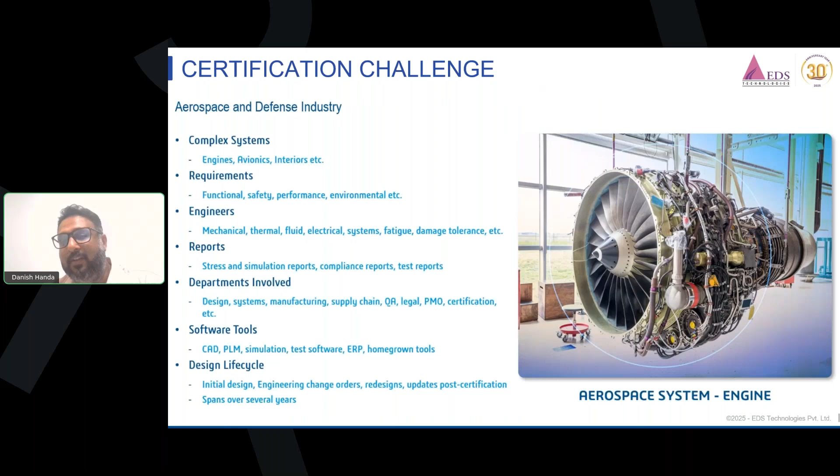So definitely there are some departments and tools involved, because physical testing and all will definitely inculcate a huge cost. So how we can cut down the cost is through our software solutions - that is good CAD solution, good simulation solution, good testing software, even product lifecycle management, etc. So today we will be having interest over these particular aspects.

So this was one of the examples I showed, but definitely it's not the only one. There are several examples, case studies, and challenges that aerospace industries deal with, in terms of system architecture, powers, solar power, battery modules, because nowadays many industries are working on battery packed aircraft, fuel cells, and entire avionics architecture. Then there's fluid dynamics, air flows, headwinds, tailwinds, gearboxes, and definitely the structural aspect is one of the cases. So we'll be studying how we can help you with all these aspects.

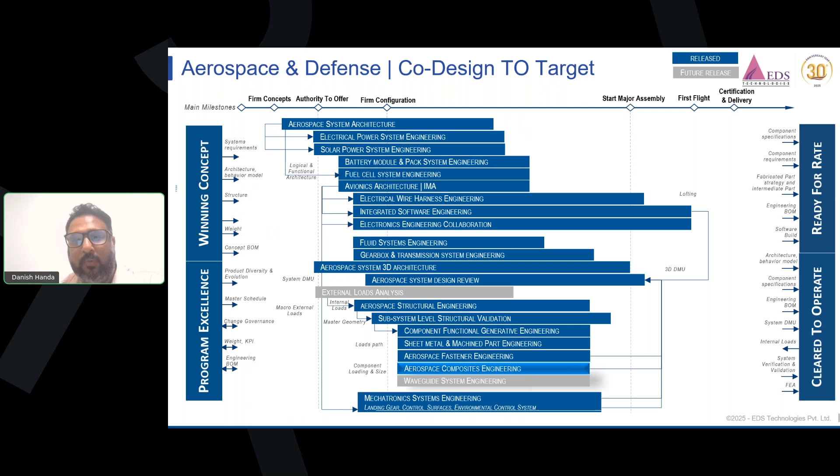So I want to show you one video of how Airbus is handling things smartly with respect to our solution. This is a short video.

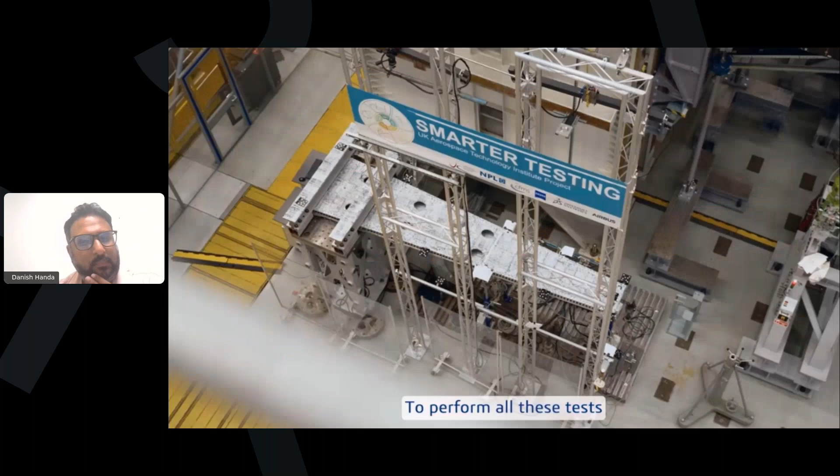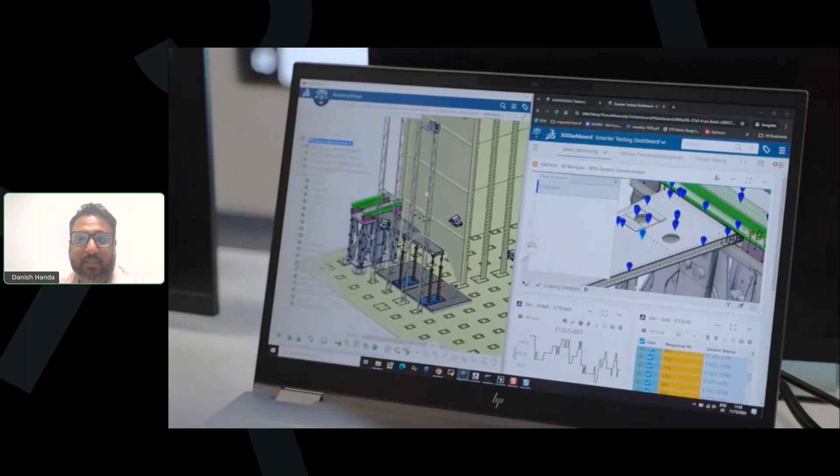This is basically a smart testing rig, which is very expensive, that they use for their actual testing. But as I told you, these can be replaced by simulations, reducing the overall cost of the prototype, because many such prototypes need to be developed. You can visualize here, they have created an entire test rig and how they are doing simulations based on that.

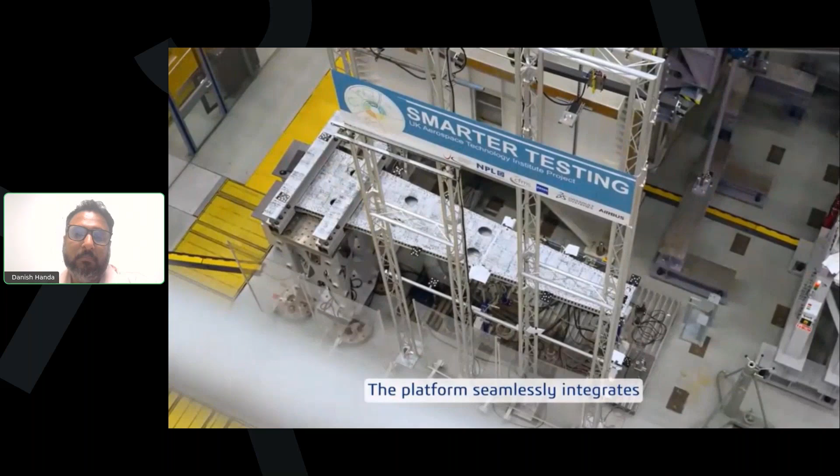So Dassault Systèmes definitely gives you a better view of how this particular test, with respect to all your standards, can be performed in a well-mannered environment. So from design to simulation to product lifecycle management to manufacturing, it can handle everything.

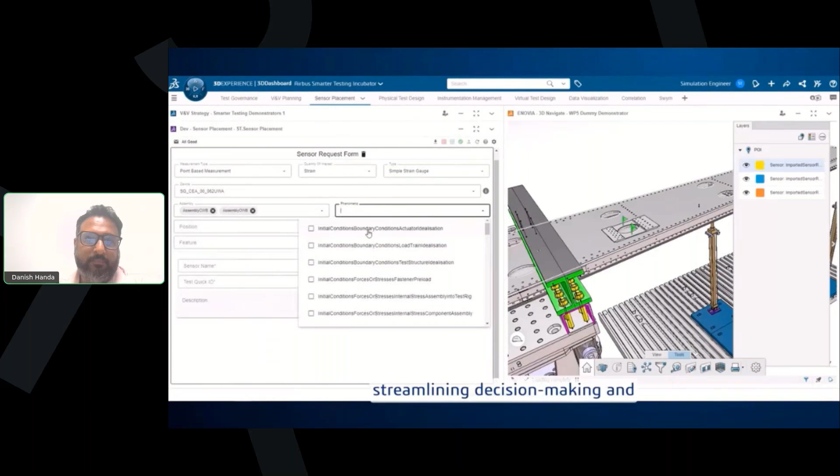So this was one of the videos I wanted to show you before moving further. Now I want to move ahead with the particular structural aspect.

As we are dealing with aerospace, one thing that comes into picture is how lightweight the structure should be, because the structure should be lighter weight as well as of highest strength. That is how we can save cost because of fuel efficiencies and the payloads we need to carry. So it is very expensive in nature. How can we reduce the cost, how can we have a better structure?

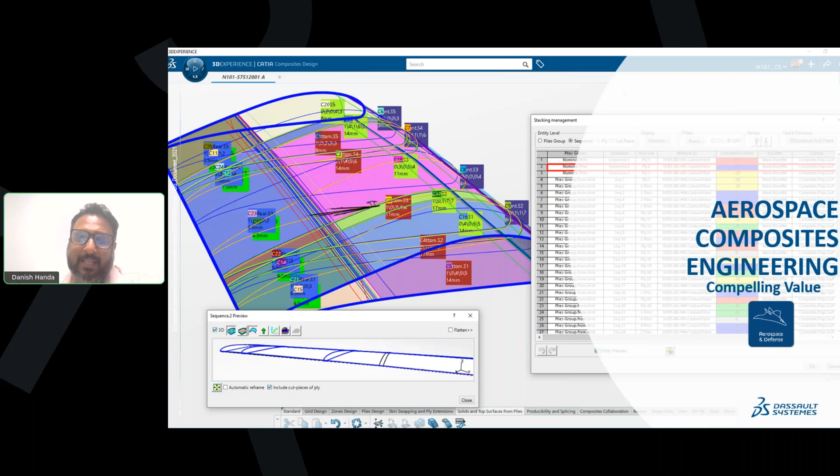So here I will make you understand how the designing as well as simulation can be done in the particular software, and how you can enhance the productivity of the components you are making.

Moving towards the first case. So if you can see here, we deal with different tools. In this case, I will be demonstrating CATIA composites. CATIA is basically a designing tool, and the composite module is introduced in CATIA to make complex shapes and structures. So you will understand how this happens, and then we will move towards simulations.

optimizations, fatigue analysis, as well as some kind of parametric and non-parametric optimizations. So this will help us understand how the interlink of designing and simulation plays a vital role.

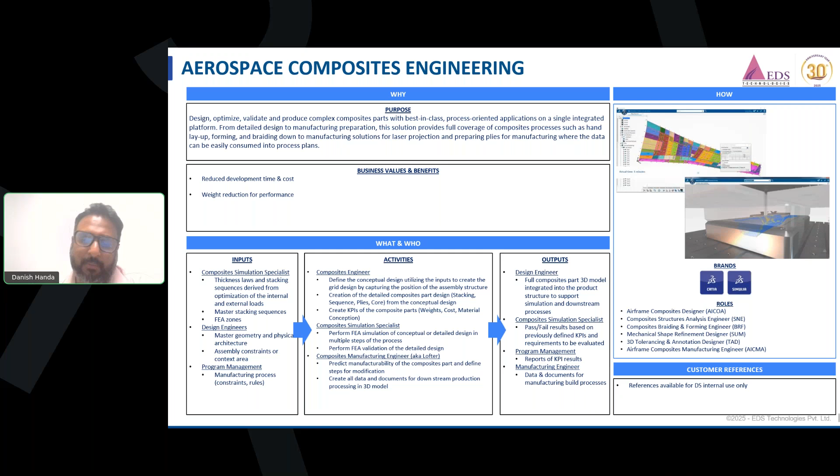As we can see here, this particular slide is towards the designing of a particular component, that is a fuselage component. So you can see that detailed design is very important. Detailed designing of composites means the layup sectioning, how staggering is happening, how ply drop, how the overlapping of composite is happening.

This is very much effective because the structures are very complex in nature. It is not uniform, so you need to have certain non-uniform thicknesses. So how is it performed?

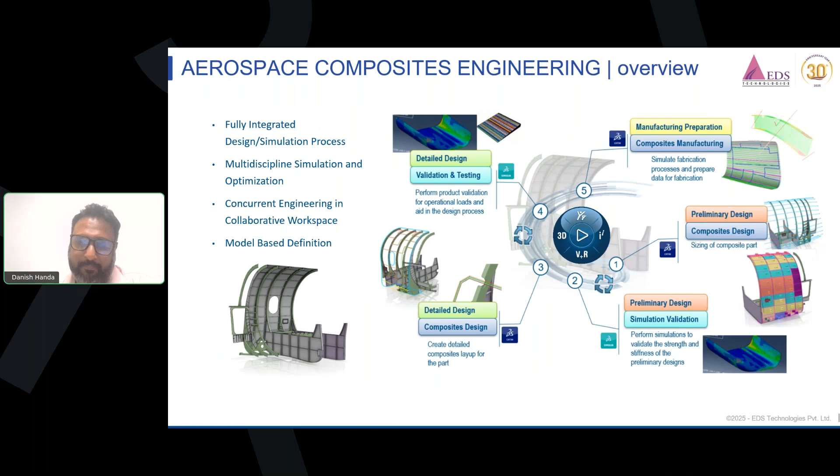So if you can see, it not only handles the layup sectioning of the composite material, but it can also handle the manufacturing engineering. We do have different software which can be integrated with CATIA to handle the manufacturability effect, such as hand layup, laser cutting effect, even automated fiber placement effects. So all these things can definitely be very well handled with respect to simulation.

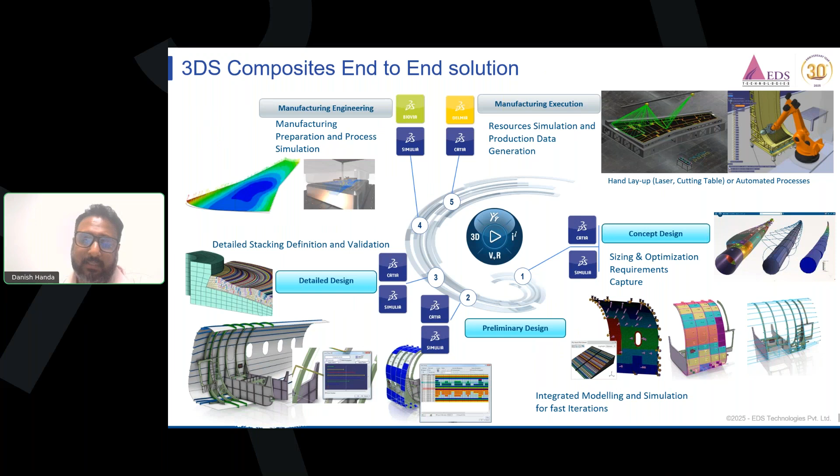And how we do the composite designing is with respect to four different criteria: manual ply, known as hand layup sectioning, then classical zone approach, solid slicing approaches, and grid design. So I'll be demonstrating what all these things are.

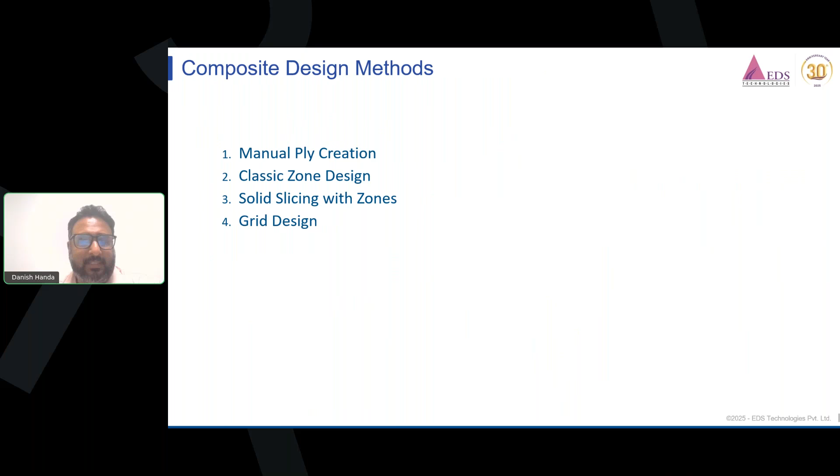So first of all, the manual approach. As we do hand layup processes, that is, we cut the prepregs or we cut the fabrics and we place them on the particular aspect.

This is known as manual ply creation, where you understand what ply you will be putting first on the mandrel or mold, then give the material properties as well as material orientation to that particular ply, and then get the manufacturing drawing out of it.

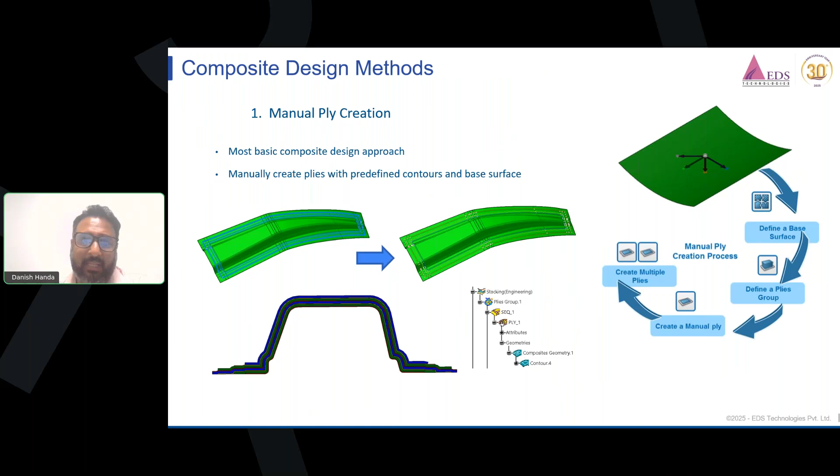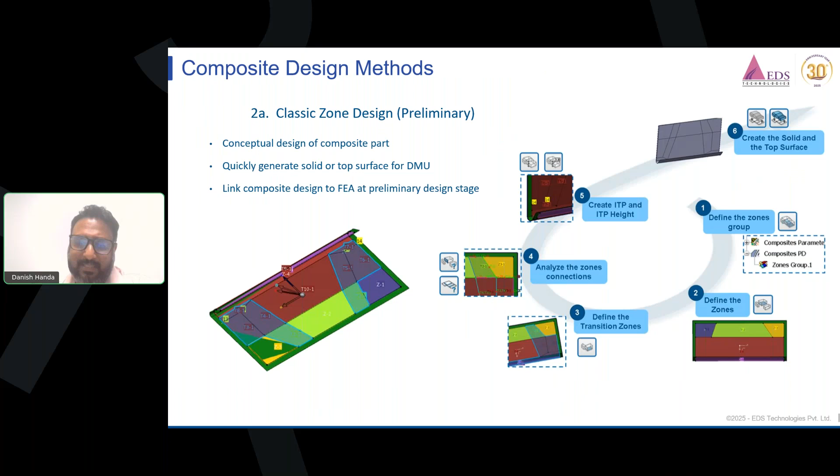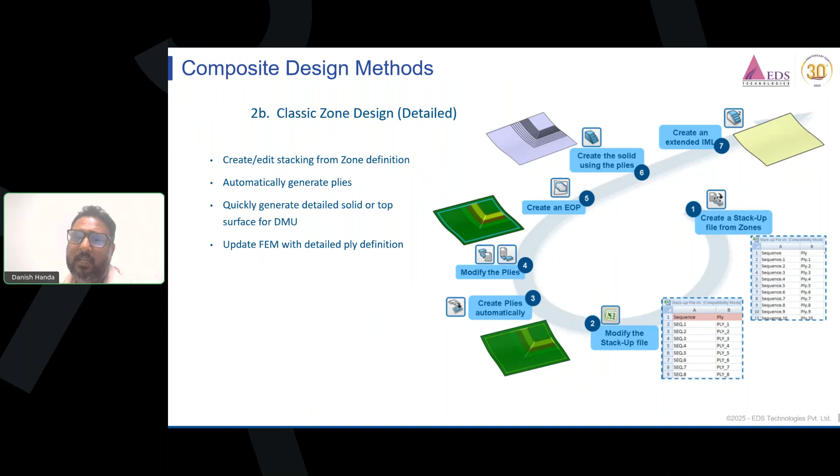Then again, there is a classical zone approach where you have edges, and you need to handle the stack up sequences and the staggering effect of the composite material. All of this comes into picture.

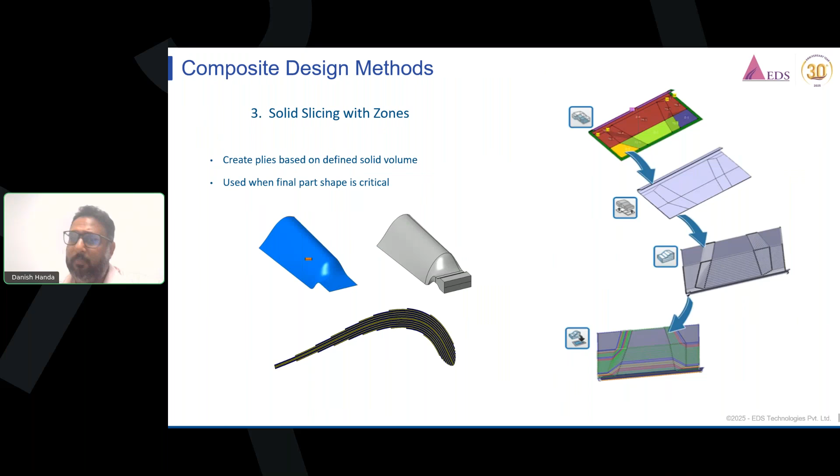And then the solid zone approach, where you can model the composite over a particular solid body also. So both surface body as well as solid body modeling can be easily performed.

And then there is a grid design approach. So basically, if you talk about the wing structure, it is tapered, with some kind of non-uniform thicknesses.

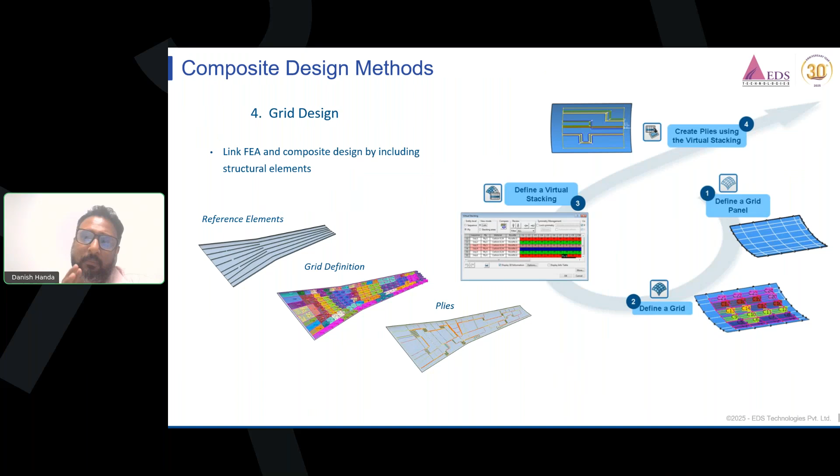Here the approach of a grid is very necessary, because you have to bifurcate your wings into small sections to have a certain amount of ply stack up into it. So this stacking with respect to the wing structure is performed in a very uniform manner without much complexity in your drawings.

This was regarding the designing part. So now we are coming towards the manufacturing part.

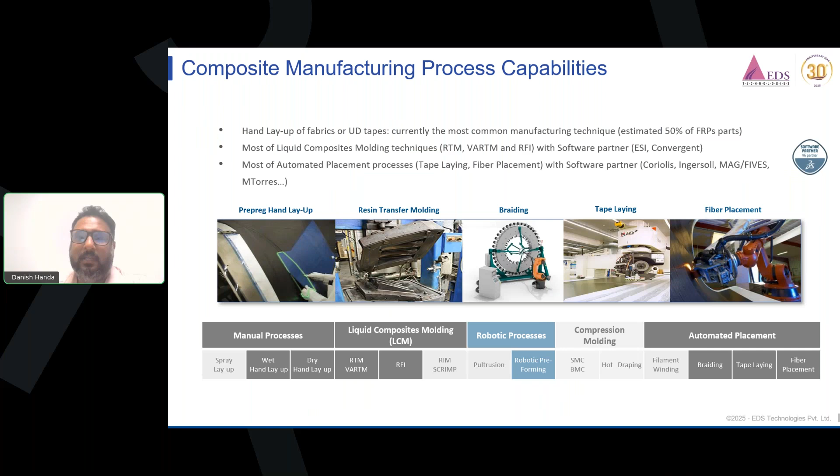As you know, there are a lot of manufacturing processes available for manufacturing composites, such as hand layup, resin transfer molding, tape laying, or automated fiber placement. This particular software integrated with our manufacturing software can handle the manufacturing processes very well, so you can understand what is happening with what kind of manufacturing process. It will be much easier for us to establish this particular environment.

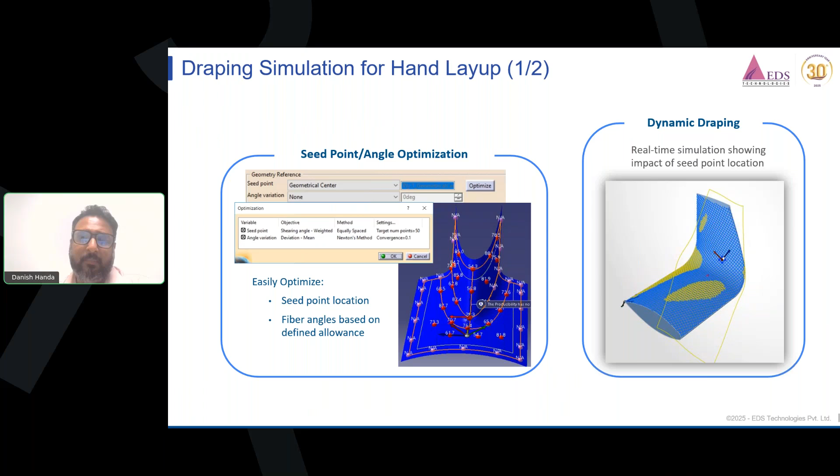For example, a particular component is there, and you can see how the draping effect is happening, what kind of bending will happen in the fiber, whether the fiber will be having kinking effects or not. All these things will be understandable in a very better format.

Then again, smoothing regions, where you can handle whether the curvatures work or not, and how the simulation can happen. All these things will be very much suitable for you.

And then of course the braiding effects - this is also one of the very common and important manufacturing processes, because nowadays all kinds of ducts, pipes and so on are made up of braids. These kinds of effects can also be very well modeled and simulated.

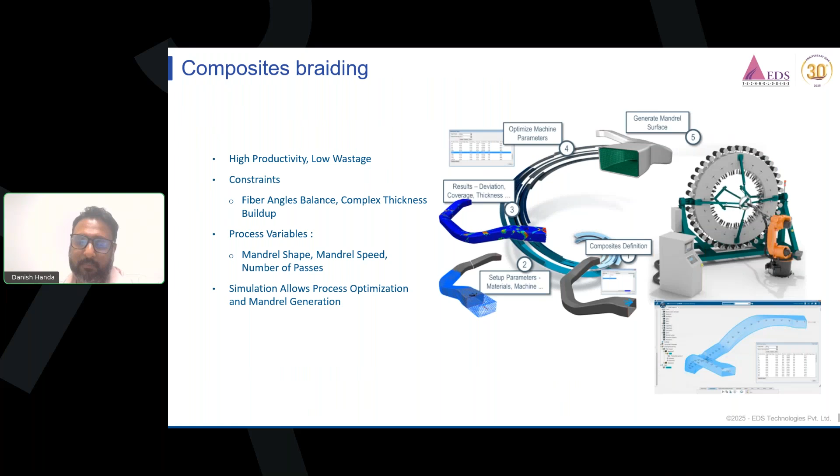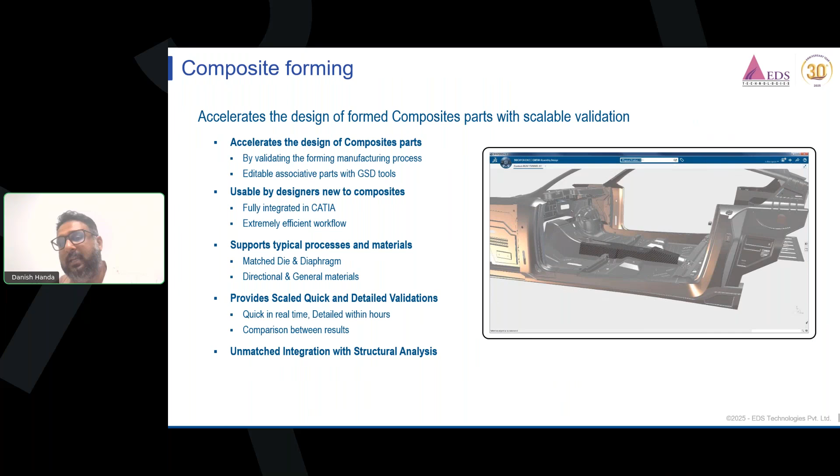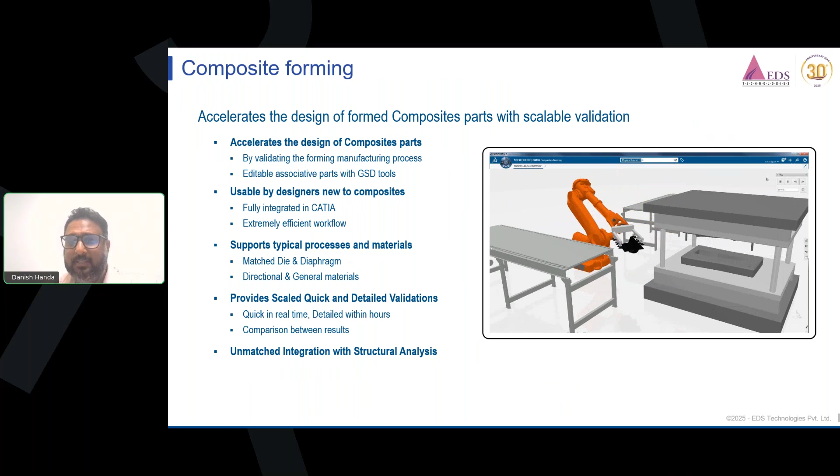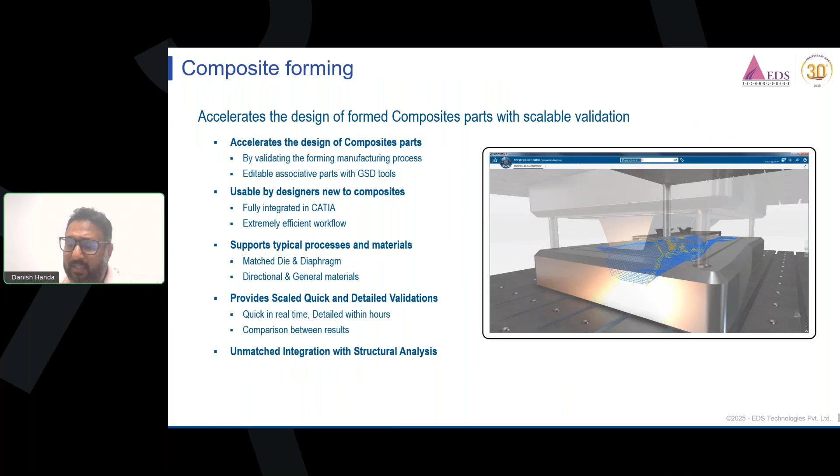This is how you can easily do the simulations and check how your fiber has to be cut, how much pressure is required, how well this integration will be there with respect to the forming, what is happening inside, where the effects of molds are occurring on the fiber part, whether everything is fine or not.

So you can develop a good mold design as well. This is the benefit.

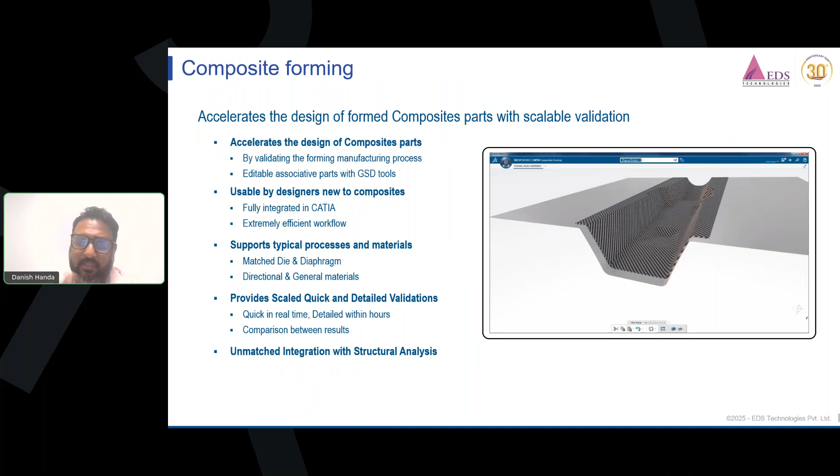Then of course you have to manufacture the part. This particular software gives you the capability to model each and every layer. For example, there are 10 layers in your composite, so it shows how to cut each layer, what each layer looks like - basically an open view or a section view of a particular layer sectioning.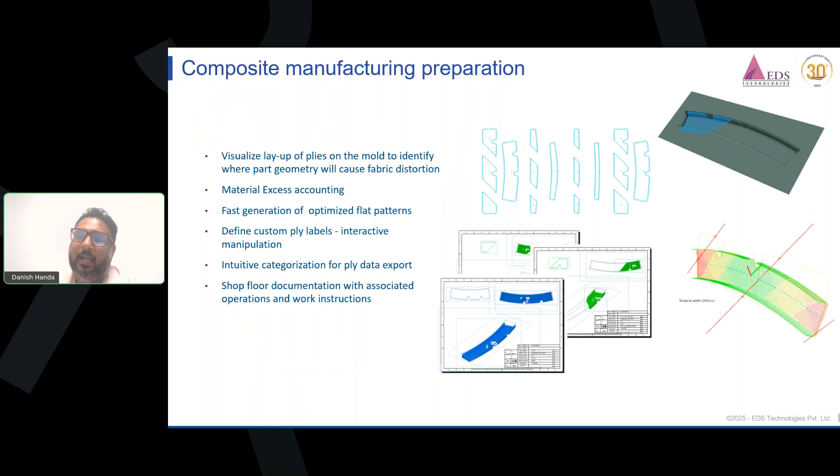It will automatically tell you that this way, if you cut, is the better way to cut the fibers. So it will save a lot of the amount that goes into manual cutting of fibers, which may have a huge cost, and this can basically save a lot of money.

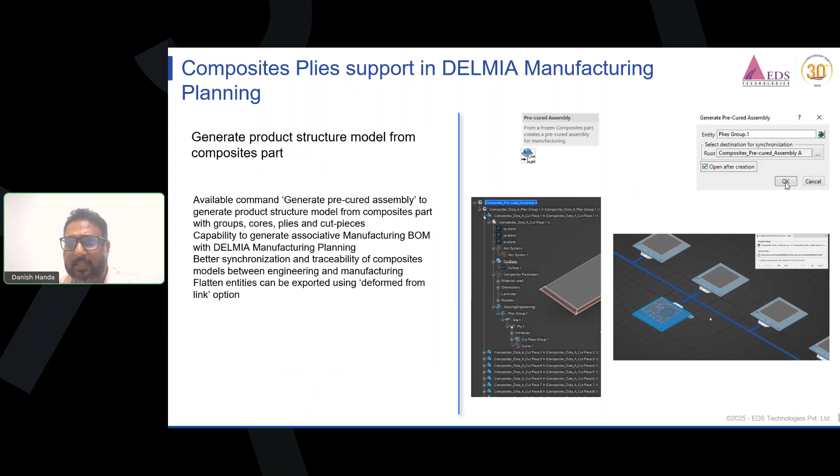We also have a digital manufacturing software, which, like I showed you how the robot is carrying the material, this software integrated with the modeling tool can help you out with all kinds of layer cutting, sectioning, and all these producibility-related things.

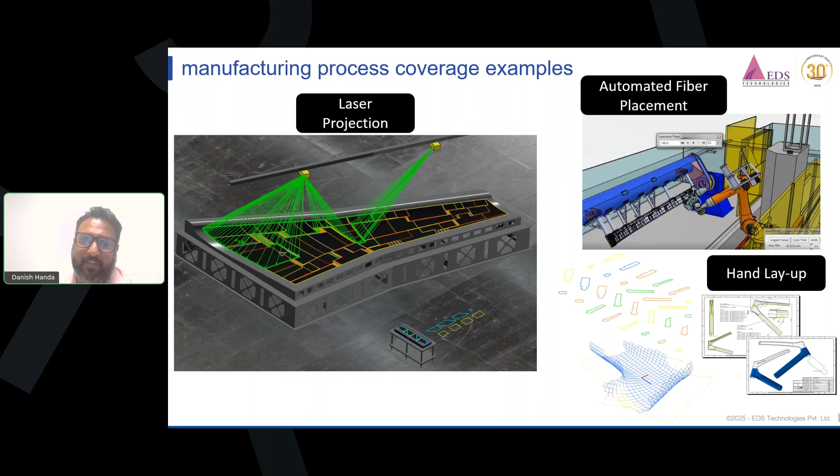You can see here how it can help you out with laser projections, automated fiber placements, or even hand layup. You can see how the fibers have been cut here. You can visualize the effects of single layers and how they have to be placed with respect to lasers, hand layup, or automated fiber placements. This can definitely be very helpful in your field.

So this was all about manufacturing and designing. We also have solutions for the simulation aspect. There are two ways to do simulation. Our tool, as I told you, CATIA Composites, is for designing, and SIMULIA has four different portfolios into it. One is known as Abaqus, which can work with any kind of structural solutions with respect to composites, metals, alloys, foams, etc.

We also have software known as FE-SAFE, which can do fatigue and durability analysis, but it is only confined to metals, not applicable to composites, though we do have modules for weld analysis and rubber analysis. We also have software known as Tosca, which can do topological optimization in terms of reducing material and increasing strength.

Then we have Isight, which is known for parametric optimization, which can perform parametric studies and do n number of iterations automatically just to give the tolerances. So all these levels of simulation can be done.

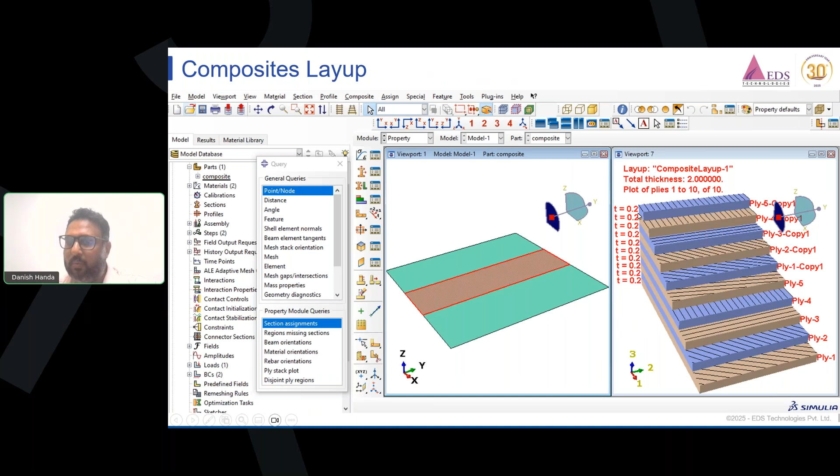If you want, you can also have the angles of orientation written over here. Like that, in the side portions there are 5 layers, so this is a kind of tapered body. This visualization effect is also not present in any other software except Abaqus. It will give you very clear-cut information on what kind of modeling you are doing and what not.

We also work on testing. We have fracture mechanics theories based on XFEM methods, that is the crack propagation technique. We work on realistic fracture models. For example, for metal we use Johnson-Cook criteria, for ceramics we use the JH2 model, and for composites we use Hashin damage criteria. Different criteria are there for viscoelastic materials, hyperelastic materials, foam materials, etc. When it comes to anisotropic materials, we use the entire anisotropic properties of the materials.

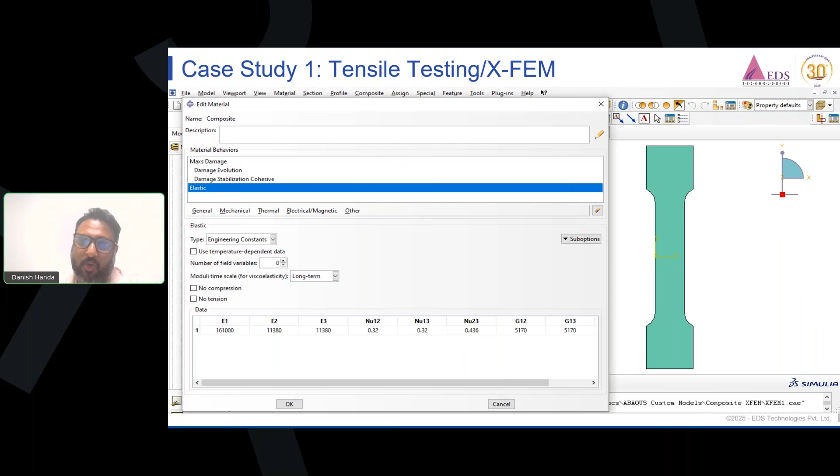Nowadays the era has shifted. Earlier, it was okay to just do some linear simulations, but now you have to do failure analysis, fracture analysis, and give the warranty to your OEMs for having this particular component. So all these things are required a lot nowadays.

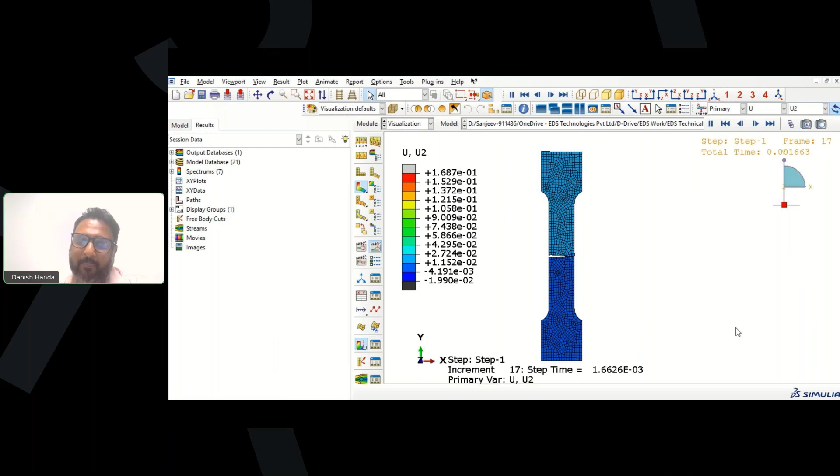So you can also do some kind of tensile testing with respect to crack propagation. You can get the realistic effect of how stress-strain curves are obtained, and you can obtain stress-strain curves in the software. You can also analyze the particular form in terms of ply, what is happening in a single ply. When it comes to composites, we don't first go toward the thicknesses, we always work on what happens with the single ply, and that can also be visualized.

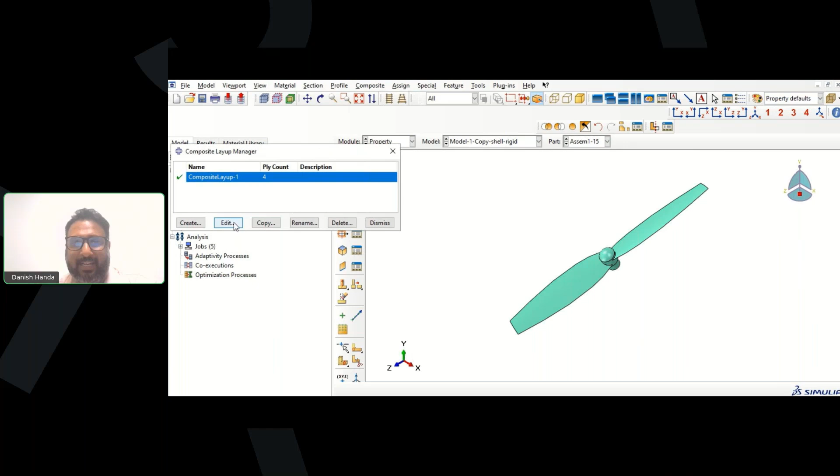This is one of the case studies for drones. You can see here some different parts have been integrated into the particular assembly level. Once these parts are integrated, we give the material properties in terms of composites, aluminium, etc. Different parts have different material properties, and based on that, a fracture analysis on the wings has been studied. So if the loads are very high on the wings, how the breakages of the wings in terms of composites happens.

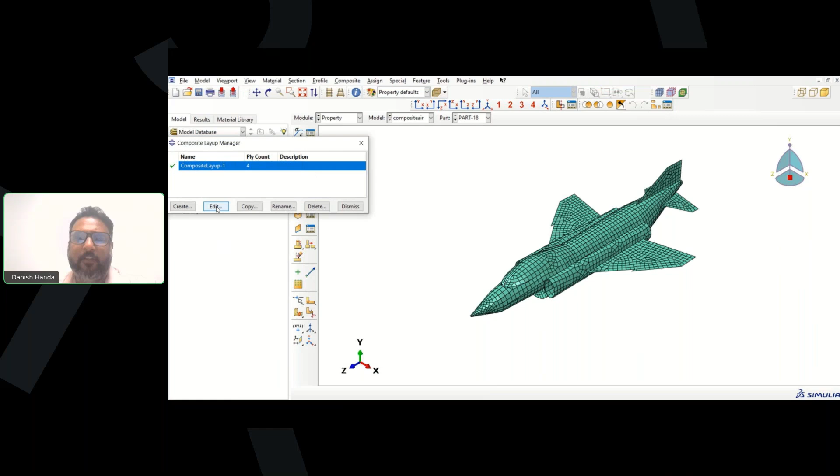This is another case study where an entire aircraft is aligned, using totally anisotropic properties as well as damage properties. The output shows the aircraft crashing against a rigid wall and what happens to the entire structure. The damage is very close to what we get experimentally in terms of crushing of fiber reinforced composites. This is how the entire scenario is developed.

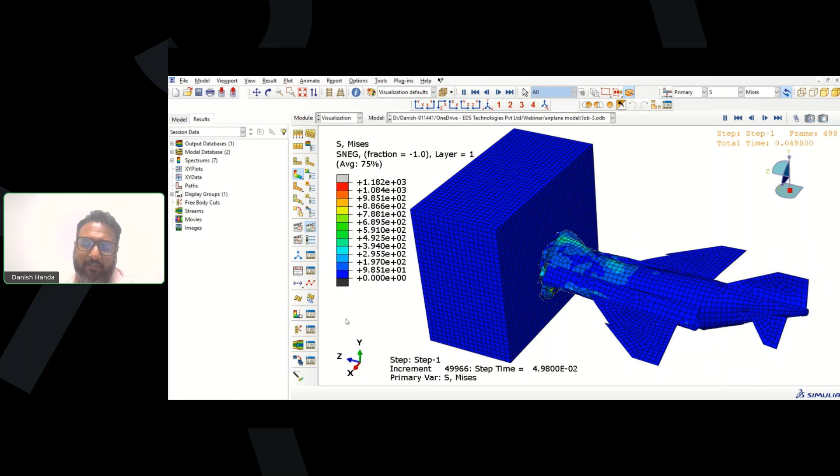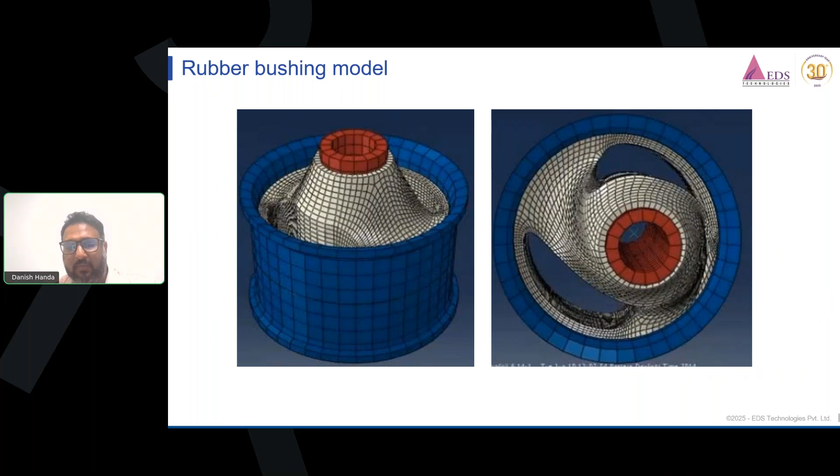We also have a very nice tool for simulation of rubber bushings, rubber gaskets, etc. You can see the difference between the deformable part and the non-deformable part. The entire non-linearity is taken care of with respect to contact and convergence in our tool, and you can also see how self-contact has been incorporated here, making it a completely realistic model.

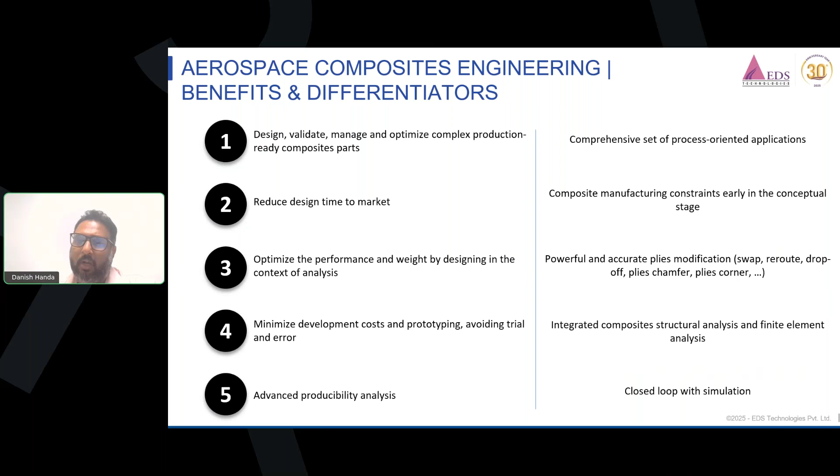These are some of the benefits and differentiators: advanced producibility, and how we can reduce time to market, because there might be many prototypes to test since it's an aerospace component that has to be very safe and secure for manufacturers and the industry. So we need to be very optimal in the approach. These tools can definitely help you with optimum designs with lesser weight, higher strength, etc.

This was about the designing part as well as the simulation part. We also have a solution for your data management, with which you can do inventory management and product lifecycle management. You can always have the up-to-date version of your drawings, because there might be many changes you perform in the designs.

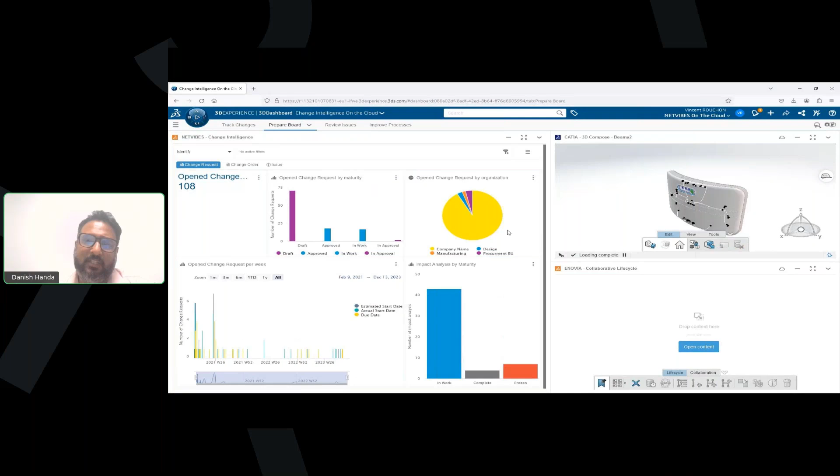We work with an end-to-end solution, from the start to the manufacturing processes. Here you can see the entire change management and how changes are done across different versions. You can also have data management, comparing data with respect to several designing aspects, and track all the changes happening in the organization. That will be very helpful and useful to you.

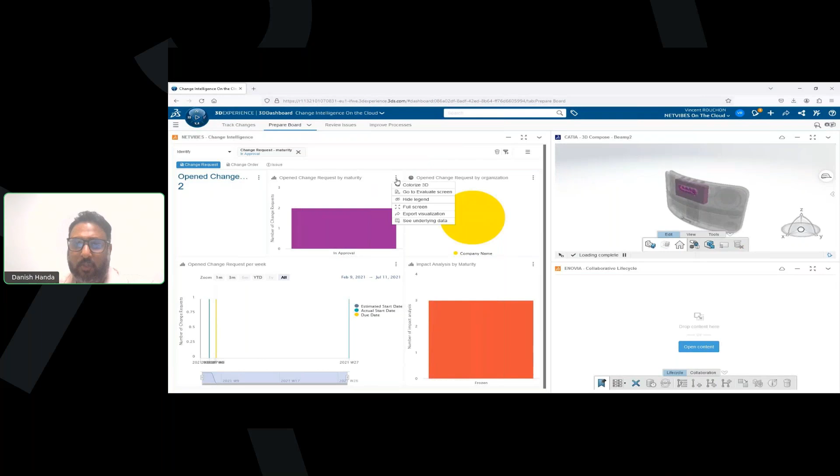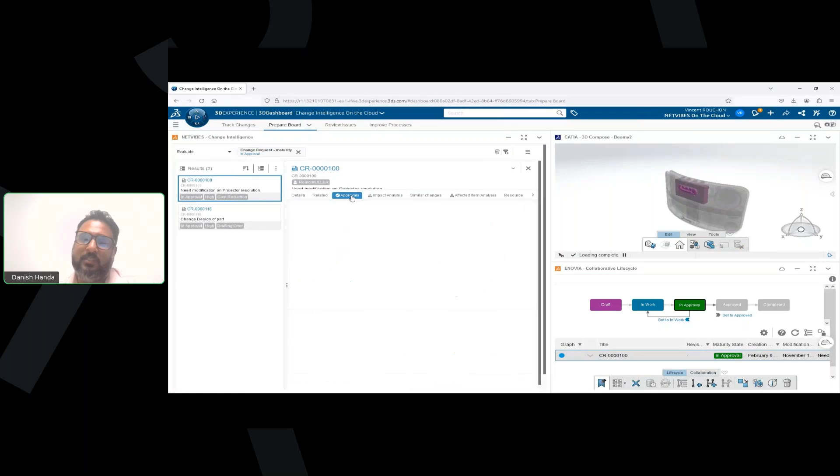The benefit of this particular software is that it comes both on cloud and on premises. If you go with on cloud, even if you are sitting in a foreign country and your team is working in India or anywhere else in the world, you can visualize the results, targets, or versions on your mobile phone itself. You don't need any other software—only one application is required to access the entire data.

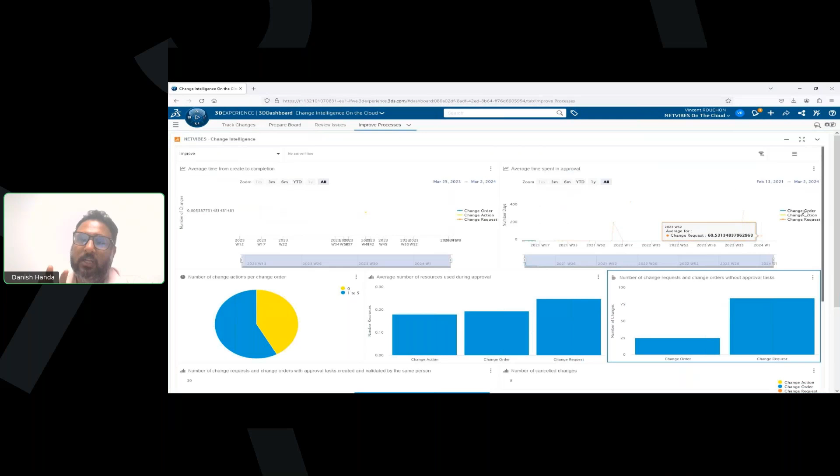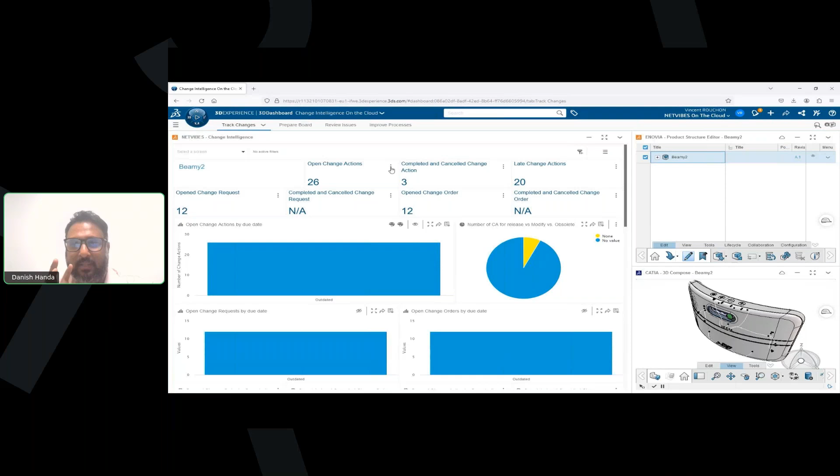This is not very simple to misuse, because, for example, you are the person holding the license, so you can only give access to the person who can view or edit this particular data. It's very secure as well, because in the aerospace industry we need to secure our data. Data is 100% secure in the Dassault cloud, which is given to specific login IDs, so only the person who has access to that login ID can grant access to others. So it is very much secured.

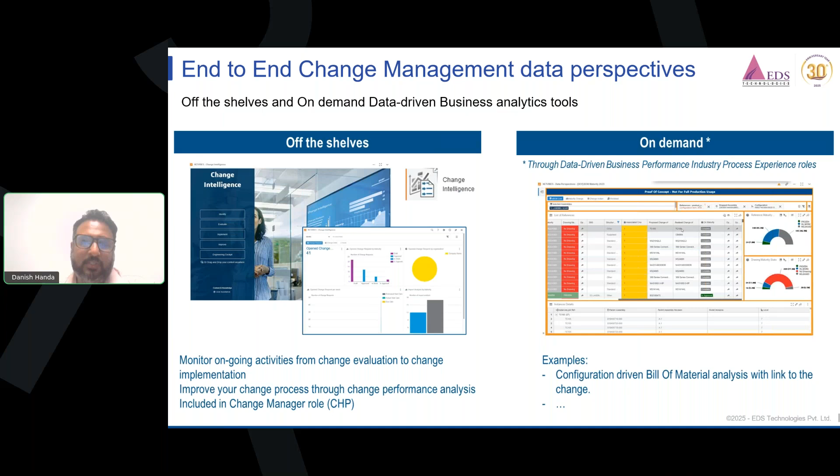This is one kind of example where you can provide your bill of materials from the same application, our software, and manage your entire data with respect to the solutions you can provide to your organizations.

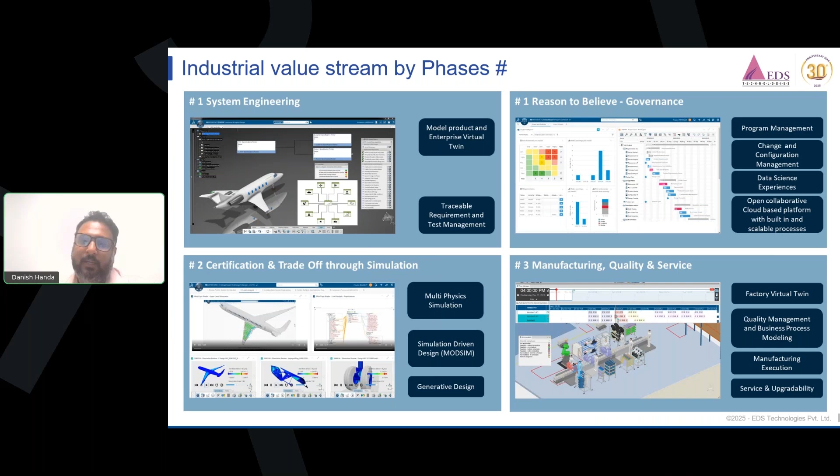As I was saying, this webinar is meant to help you understand how things work from start to end—from system level engineering to data management, to performing simulations in a multiphysics environment, to designing a particular workforce, to the manufacturing aspect of the component. We can handle each and every aspect through our solutions, and the benefit is you don't require different tools for different studies. We have a single GUI system where, through integration, you can have all these software tools—it's a role-based software that can provide you all this data.

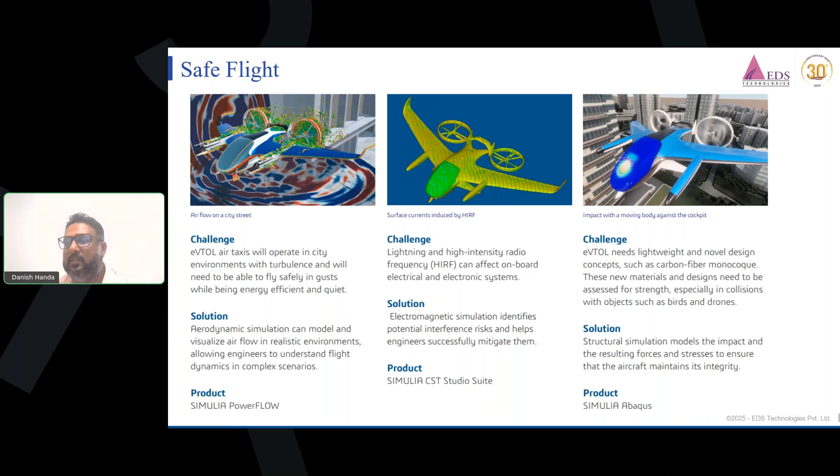A few examples I couldn't show in the previous slides: it's not only structural or design related, but we also have solutions for flow analysis in realistic environment settings, covering acoustics, electromagnetic challenges, structural challenges, and even noise, vibration, and vortex flows can be handled very well. So we have solutions for all these scenarios.

Nowadays EV has been in trend, hydrogen fuels have been in trend, and even the lightweighting effect and challenges with respect to motors are there. So we can cater to all these challenges.

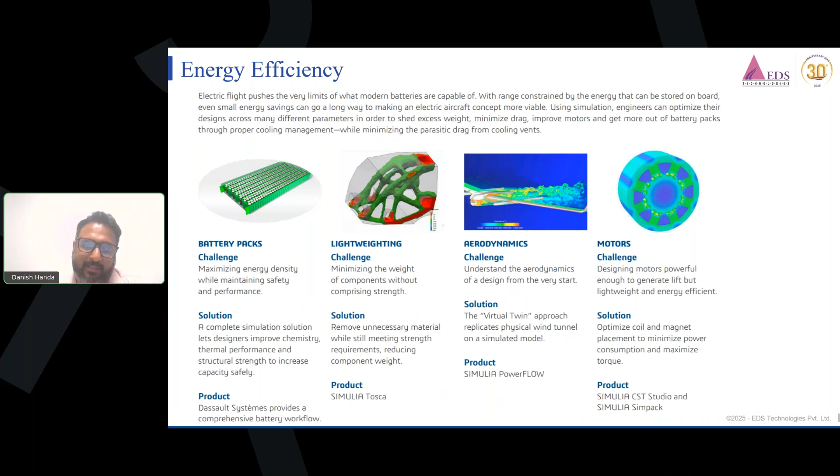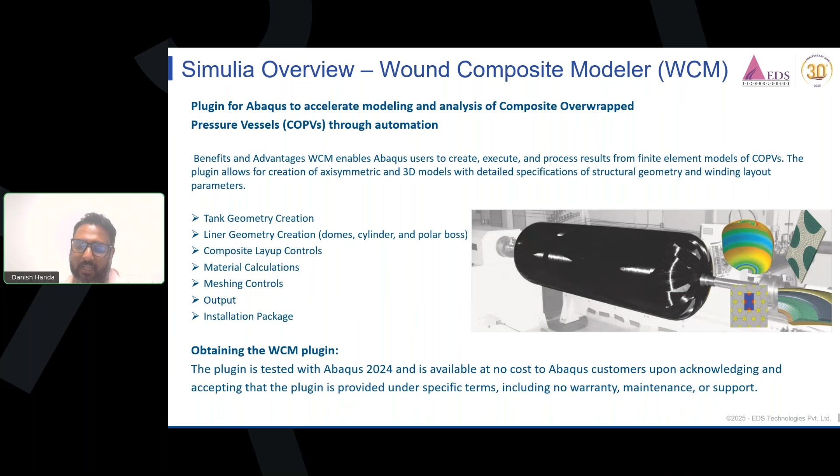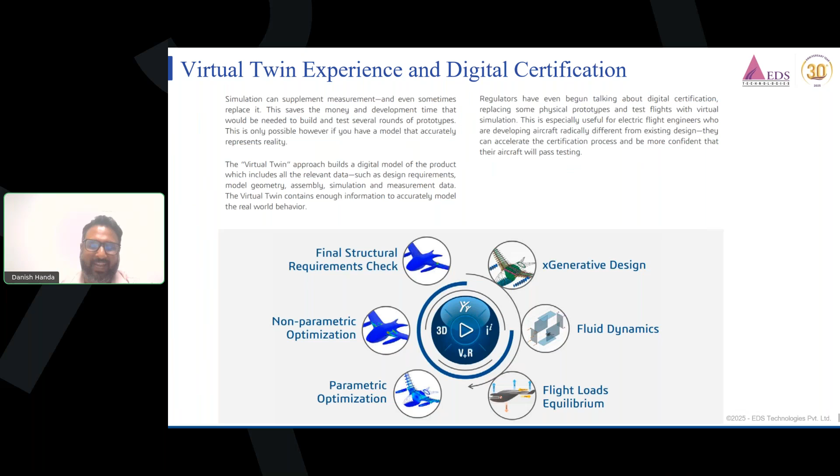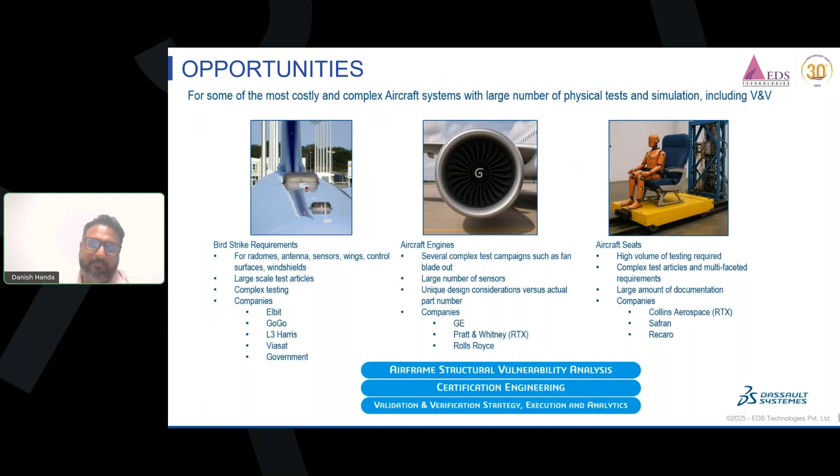We not only sell the software, but we definitely have a complete business plan for our customers. We provide on-site trainings, and offline and online trainings. We have a setup where our customers get everyone free-of-cost training from our side, which can help them understand the software well.

We also have a dedicated support team that is available and very transparent in solving your problems. So we look forward to collaborating with all you industry people and even colleges, because we have catered to a lot of colleges in these terms, especially tier 1 and tier 2 colleges. We are looking forward to a good collaboration where we can help you out with these aspects and move ahead well in the future.